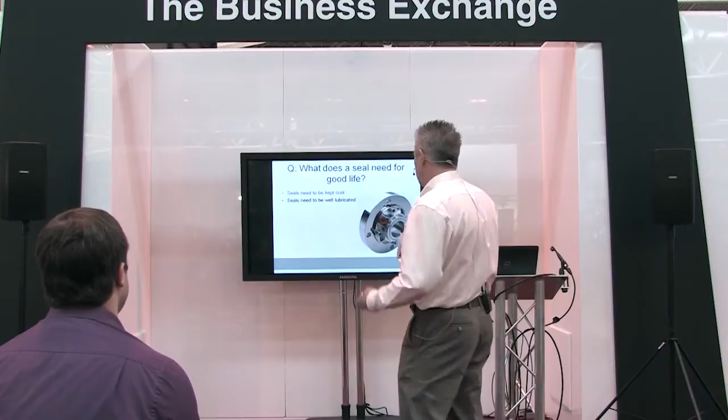Well, mechanical seals like to be kept cool, just like anything else that wants to give you good life. Mechanical seals need to be kept well lubricated, and the cooler I can keep them, guess what? Just like the engines in your car, the better lubricated that seal face will be.

I need to have a clean fluid between the seal faces, because here's the thing, all mechanical seals leak. They have to, in order to work. It's just that the level of leakage is so low you can't see it. And if you think about it, if you've got 2 seal faces in a mechanical seal, and you're running silicon carbide against silicon carbide, if they touched each other, they'd just get hot. They wouldn't last very long.

I don't allow that to happen. What I do is allow a very, very thin layer of lubricating fluid to pass between the two. And when it does, it takes the heat away. If I now allow that lubricant to be dirty, guess what? My mechanical seal won't last very long. Just like your engine in your car wouldn't last very long if you put dirty oil inside your car engine.

And I need that lubricating film to be stable. If it isn't, guess what? I've got poor lubrication between my seal faces. And now, as soon as I've got poor lubrication, guess what? I've got poor life expectancy.

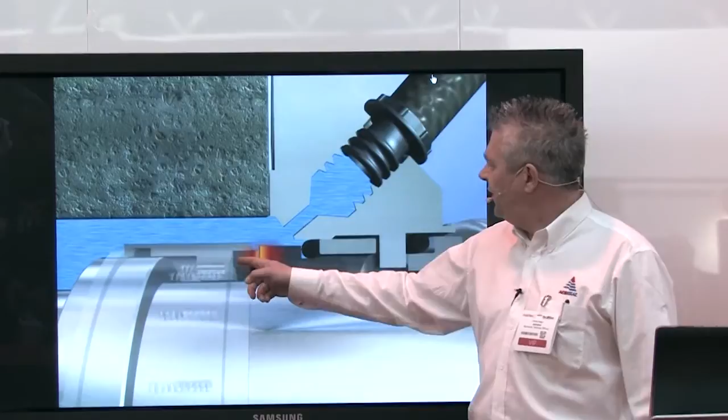Here's my mechanical seal. If I've got a single seal, it's called a single seal because I have a single pair of seal faces here. These two seal faces want to touch each other, but I don't want that to happen. So what I do is allow a microscopic layer of liquid to pass between the two, and that layer of liquid is only 1 micron thick.

Here's how it all works. If the gap between those two seal faces is only 1 micron thick, then any lumps or particles inside my fluid that are greater than a micron—and most are—now my seal faces act like a sieve. They act like a filter, stopping those dirty products from getting between the seal faces.

Because all mechanical seals leak, and high pressure always goes to low pressure. So if I can keep this gap stable, and have a nice clean fluid between my two sets of seal faces, guess what? My mechanical seal is going to last a long period of time.

But unfortunately, what we do is kill them off before they've actually got to their full life expectancy. So how do we do that?

Well, most of the problems come from equipment. A lot of industry runs pumps that are too big for the system. How do we know that? Because you run them with partially closed discharge valves. So why do you run them with partially closed discharge valves? Because the pump's putting out too much flow.

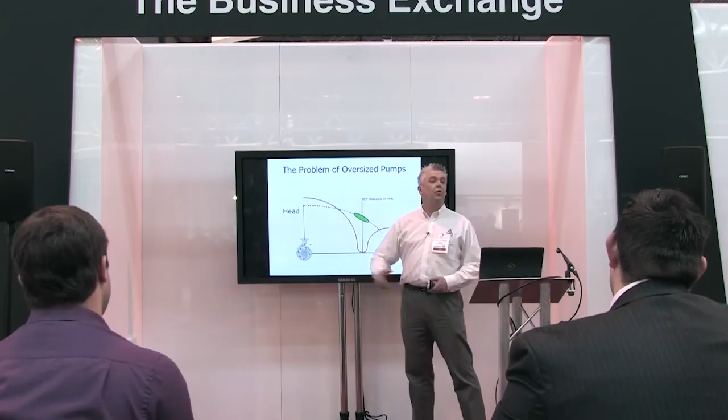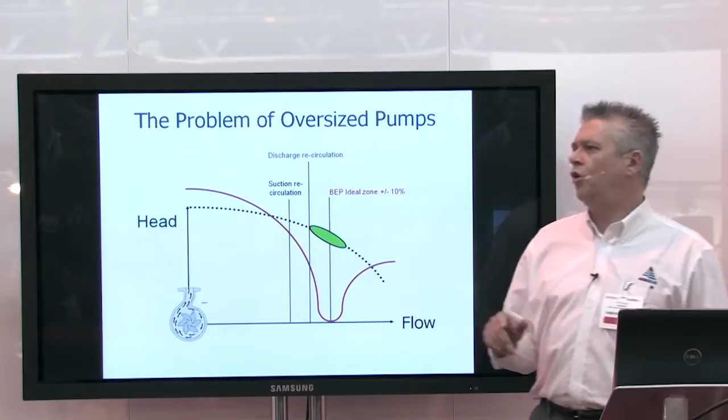As you put those forces on, you'll recirculate the liquid inside the case. If you throttle it back enough, you'll not just recirculate inside the case, you'll actually push it back to suction, because liquids follow the path of least resistance. So if it's easier for that liquid to travel 100 or 300 millimeters from discharge back to the suction side of the pump rather than going 300 meters up in the air, guess what it'll do? It'll take that shorter path.

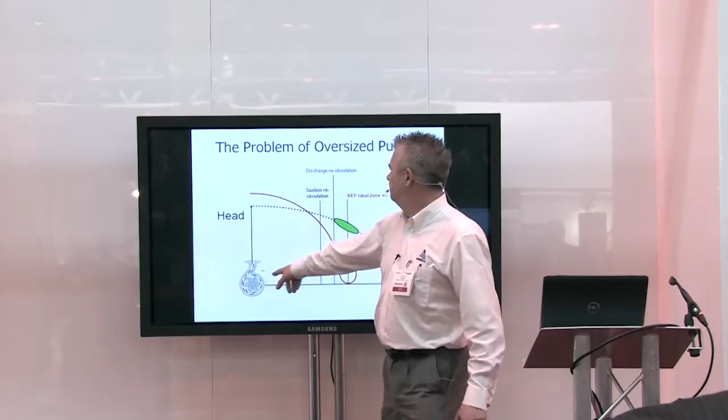I'll start to get reduced impeller life because now I start to bend the pump shaft, and the pump impeller now comes into contact with the casing, and now you have to start to replace wear rings.

Now I've got vibration occurring, and as soon as I've got vibration, this drastically affects the life of this, and also now the bearings in my pump as well. And those are the bearings you're spending a fortune on, putting expensive oils in and doing condition monitoring on, to make sure that they try and last a long time.

If I throttle it back enough, now the energy from the motor can't be used. So that energy turns itself into the easiest thing it can do - it turns itself into heat. And I raise the temperature inside the pump. As soon as I do that, I change the lubrication for my seal faces.

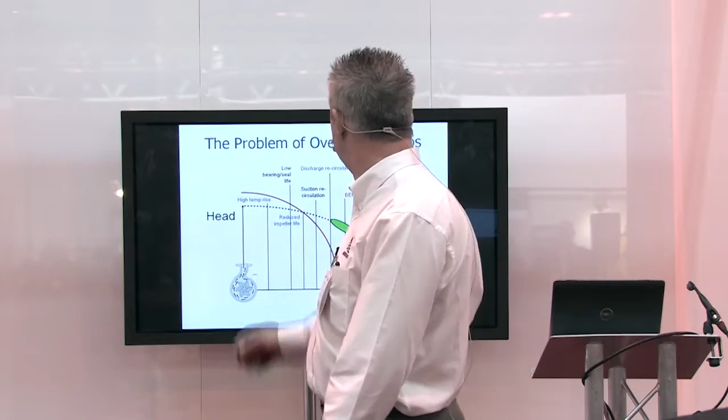If I run the other way, it doesn't matter really - I'm not going to throttle the pump back, let's just let it pump anyway. Now my pump puts hydraulic forces the other way because I'm putting out too much flow. And if I push that flow enough, I'll get to the stage where my pump starts to cavitate.

We've also got stuff like misalignment of equipment. My background is originally from maintenance, and I know we all like to align equipment properly, but sometimes we don't get the opportunity or the time. Why? Because production rules everything. Downtime is the killer, because that's a cost. So somebody somewhere has to cut a corner to get that piece of equipment back into service, and if you do, you're going to put vibration into the equipment, and that's going to damage my seal.

Because these only fail for two reasons: either the seal face opens or a part becomes damaged. And if I've got vibration, now my seal faces are opening and those particles can get inside and start to damage the seal faces.

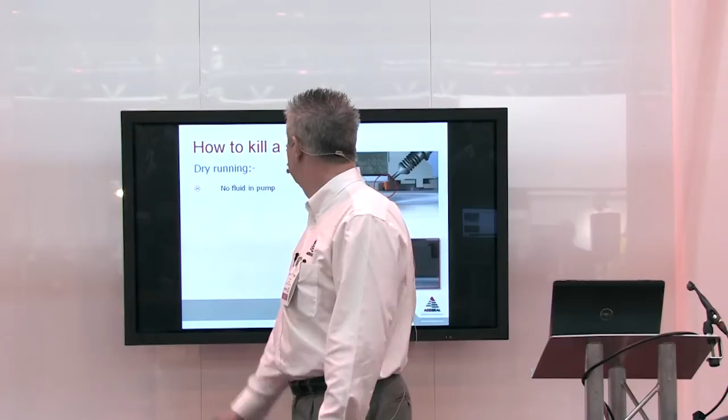Or we have people that run pumps with no fluid in - they pump tanks dry, or they don't open suction valves before they start the equipment up. And because mechanical seals are full of things like O-rings, I fry the O-rings in the seal instead, and now the seal's killed.

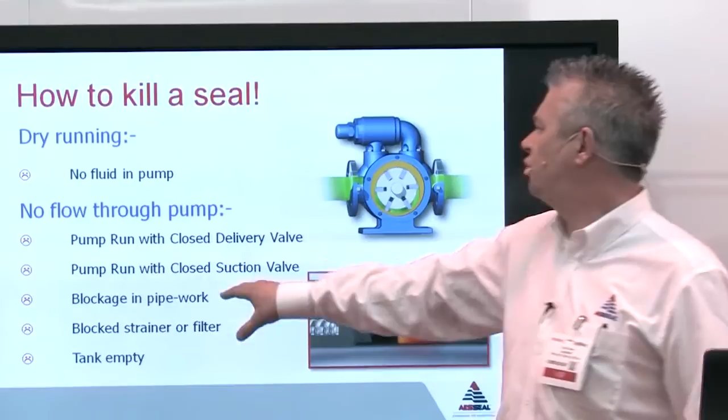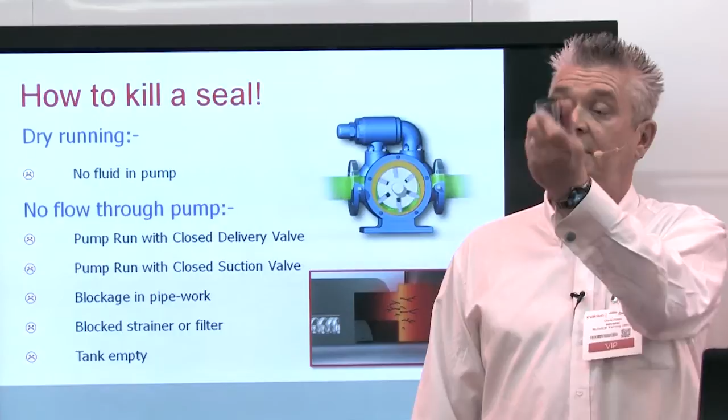Or for whatever reason, I get no flow through the pump. Somebody hasn't closed, somebody hasn't opened a discharge valve. I've got suction strainers or filters in the pump that are becoming blocked. All these things, as soon as I get no flow through the pump, I reduce the cooling to this. And these things like to be kept clean, cool, and well lubricated. If you don't, you ain't going to get good life out of them.

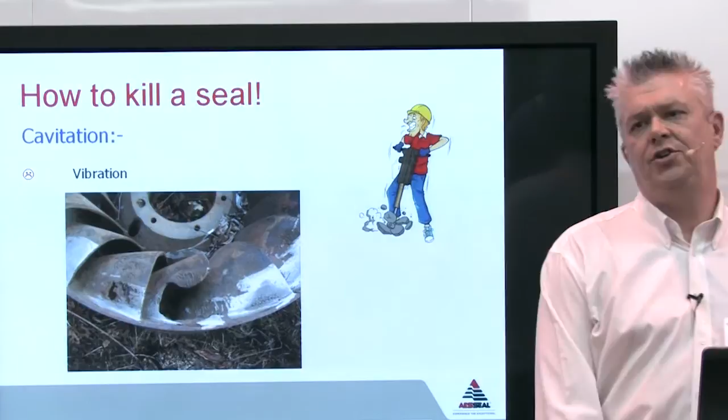We also have vibration too - cavitation damage if we push our pumps far enough. And sometimes we have pumps linked with pipework or sat on mezzanine decks. This pump here is vibrating away quite nicely, sat connected to the pump next door to it. So guess what we do? We kill the seal in the pump sat next to it because that one's vibrating.

And if we don't kill the seals, what we can quite often do is false brinell the bearings - we can flatten the bearings in the pump. So the next time we come to start it up, it's got a nice lumpy ride, and the first thing you do is take this sucker out.

What you need to have is something - you can't stop some of those things happening because that's what's going to happen. That's real life, isn't it, guys? So if you can't stop things from happening, what you need to do is put a surge protection device on your system.

If you gentlemen and ladies have got computers in your offices or at home, I bet you have some form of anti-surge device on your computer. True? Yes? Why would you have that? Because you don't want to fry your computer. True? How much does a computer cost? 600-700 quid? How much does a pump cost? Thousands. How much is downtime? Thousands. So we'll protect a £600 computer, yet we won't protect a multi-thousand-pound pump, sealing system and production facility.

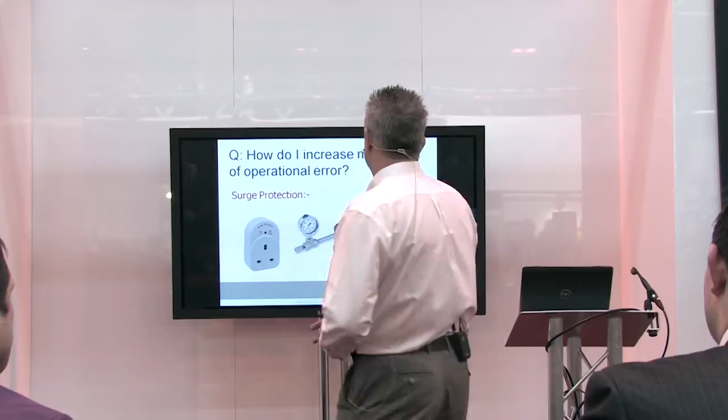We'll do things like electrical surge protection devices. We'll put safety relief valves on pressure systems, or we'll put burst discs in to prevent us from damaging stuff. Yet we don't do anything for these when things happen that are beyond my control.

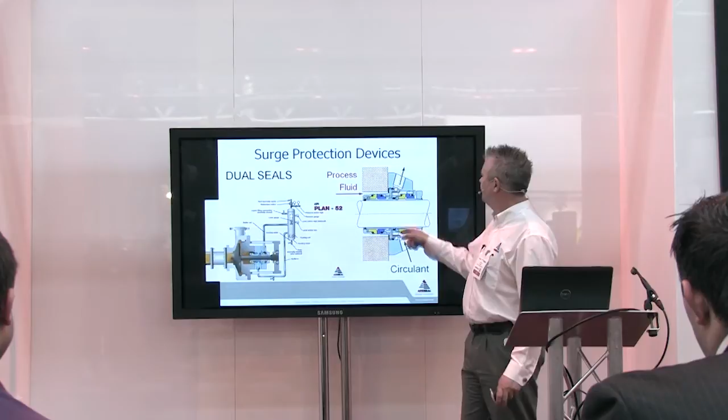But you can buy surge protection devices for mechanical seals. They're called double seals and systems. Now what we do with the double seal is, if I run a single seal, whatever the liquid is I'm pumping, that's what I'm going to use to lubricate my mechanical seal faces, because I have to get a lubricant. Now what I do with a dual seal is, I put two sets of seal faces in, and I put a circulating fluid between the two on an encapsulated system.

Now because I've done that, I get to choose the lubricating fluid that passes between those seal faces. When I run a single seal, I have to use the product to lubricate my seal faces. I haven't got a choice. So I get a bump in the night, I get those things that change the gap between my seal faces. I can't do anything to stop it.

If I put two seals in and circulate a clean, cool, compatible liquid between the two, now I do get to choose. Now when those seal faces open, which I can't stop happening, all that happens is nice, clean, cool lubricating fluid that I've picked passes through the seal faces instead.

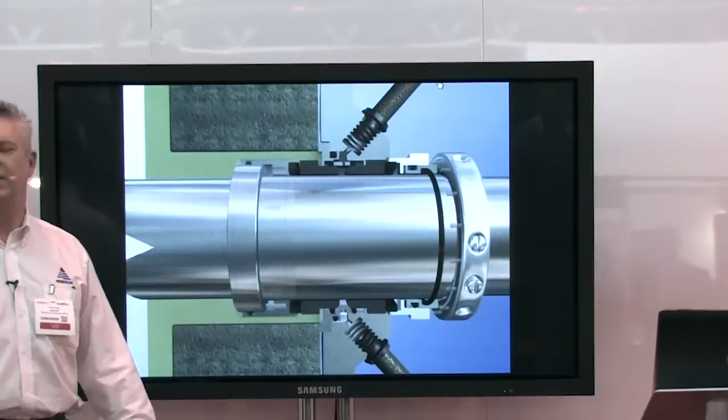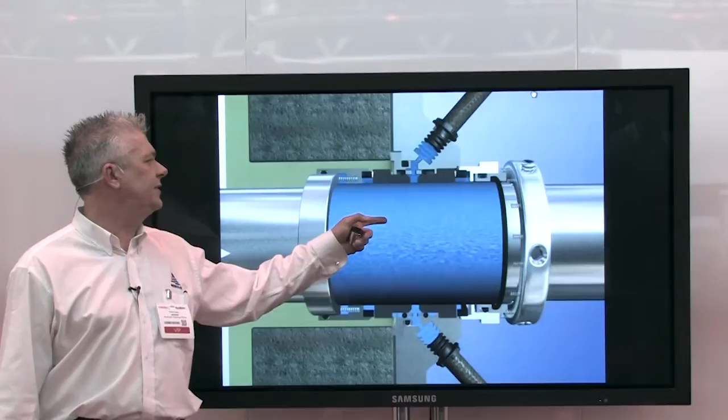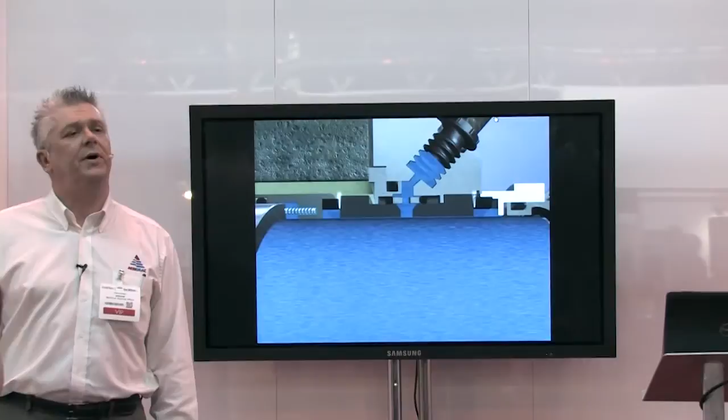So here's my dual seal, two sets of seal faces. I've now got a dirty product in here, and that dirty product wants to get between my seal faces. I don't want that to happen. So what I now do is introduce inside a clean, cool lubricating fluid, and I pressurize it inside here so that the pressure inside here is higher than the pressure inside my pump. High pressure goes to low pressure. All seals leak, so now the lubrication fluid that I've chosen passes between the seal faces, and it's a clean, cool, compatible fluid.

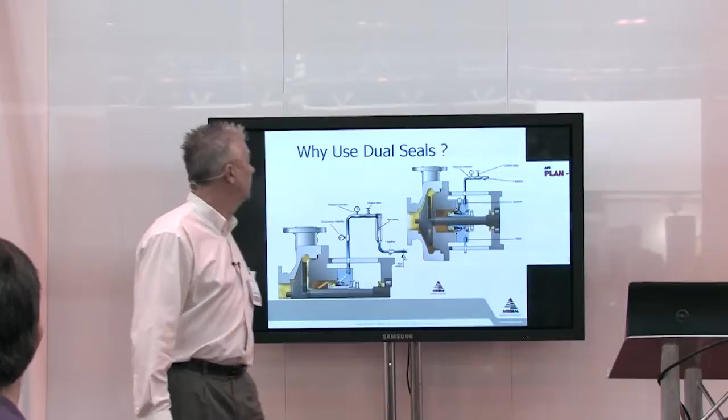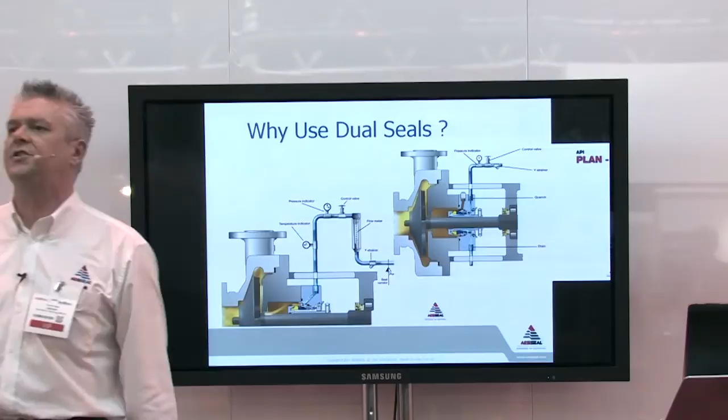If we run single seals, quite often we'll run systems like this, either with an external flush line to try and dilute the fluid inside or cool it, or we'll run sealing systems on the atmospheric side of the seal. So as those liquids pass between the seal faces and leave deposits inside the seal, I put a circulating fluid inside that takes those away.

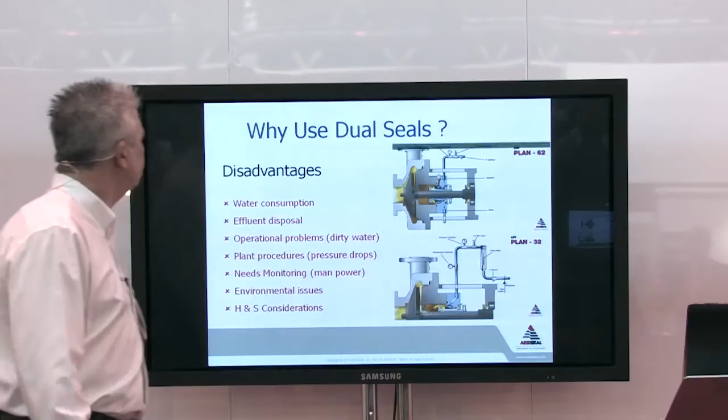But there are lots of problems with running systems like that. I'm going to use a lot of water, and that water is actually going to end up in my effluent system at some stage, or I'm going to have to extract it, and that's all a cost.

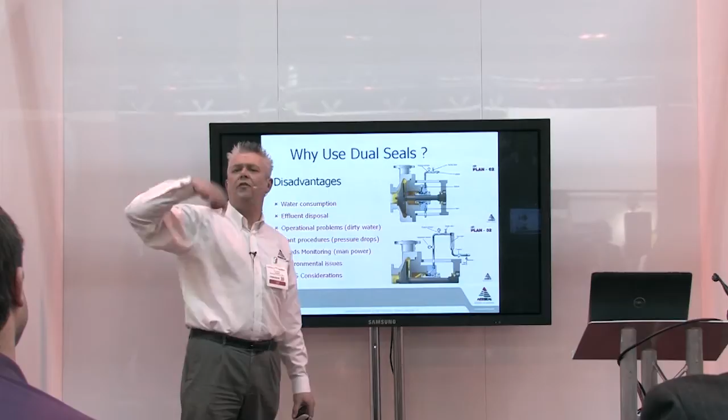I have the problems with plant drawing down on that water ring main as well, because we have people that wash equipment down. Do you wash equipment down? And when you wash equipment down, the guys don't use half-inch hoses, do they? They use like a 2-inch or 3-inch fire hose, and now they're spraying that stuff around all over the place. And as soon as they do, they rob that ring main of the fluid that's now controlling your mechanical seals.

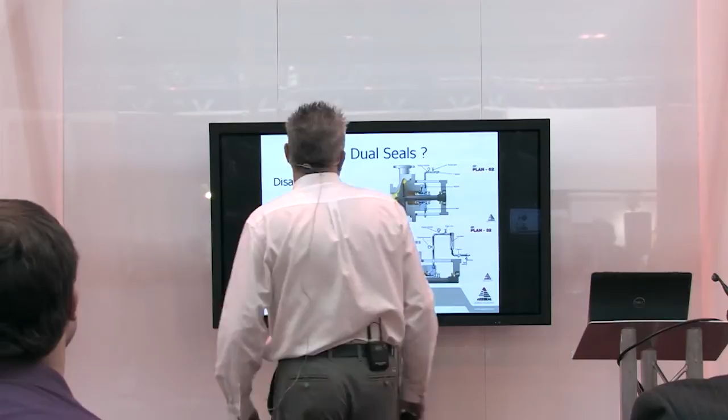And we also have environmental issues and health and safety issues with running seals that can leak into atmosphere.

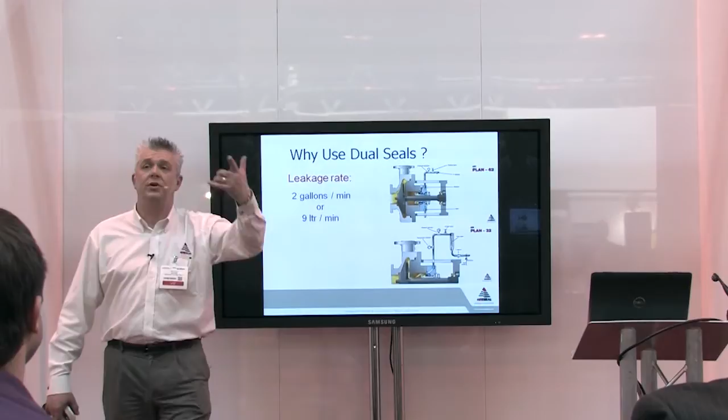Here's something that's interesting now. If you have a leakage rate on one of these seals with a flush line or a quench to drain, which are really, really common, if you have a leakage rate that's as low as 2 gallons a minute, that's the equivalent of 1 million gallons of water per year per seal. And that 1 million gallons of water is either going to end up in your product and you've got to extract it, or it's going to end up in your effluent system, you're going to have to clean it and then dispose of it.

1 million gallons of water a year? Sounds like a lot. Can anybody picture 1 million gallons of water? Bit hard, isn't it? 1 million gallons of water is approximately equivalent to around 16 road tankers full per month. So if you run pumps with flushes on or quench to drains, that's the amount of water you are leaking and wasting into your product every year.

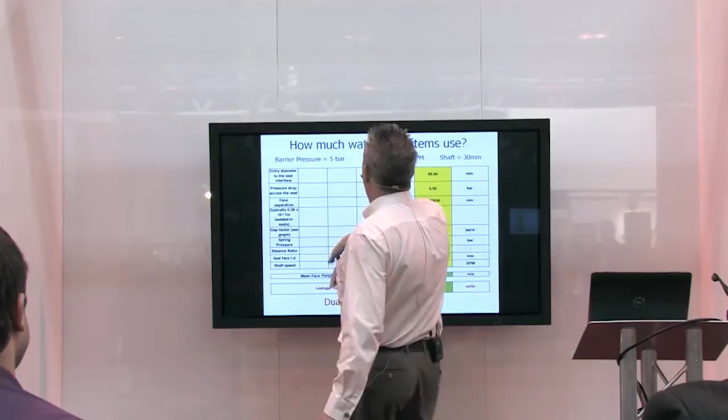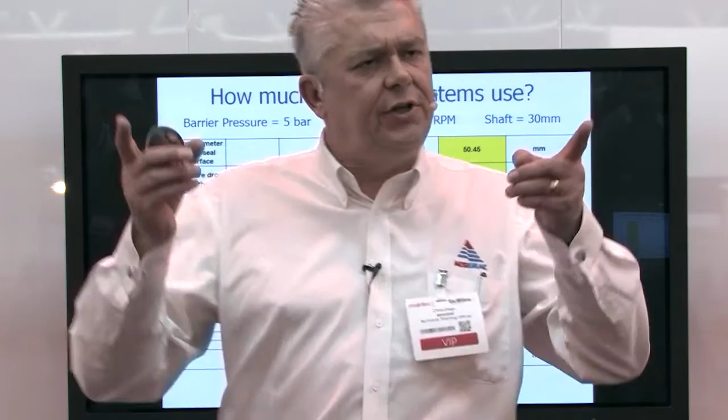Well, if you're running quench to drains or flush systems, you're using 16 road tankers worth a month. If you change over to a dual seal with a seal support system, your leakage rate now is down to less than a teaspoon a day, or the equivalent of about half a can of Coke a month. So you can either use 16 road tankers of water, or you can use half a can of Coke. I'll leave it up to you to decide which one you'd rather use.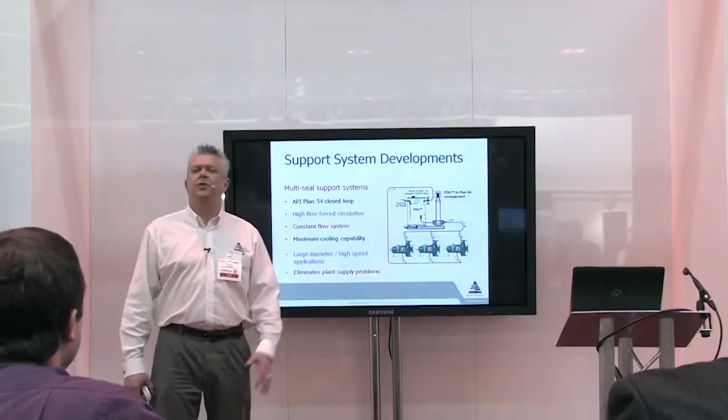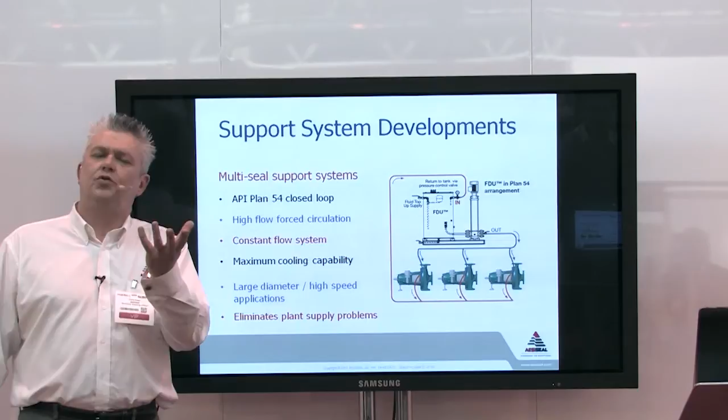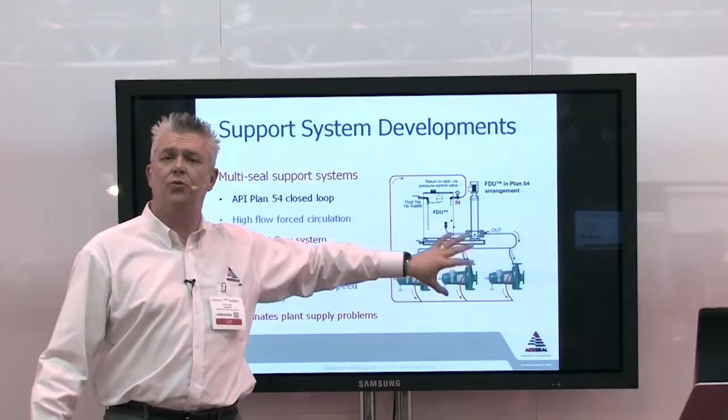So what can we do? There have been developments with systems now where we can support multiple seals from dedicated circulation systems, because we want to get away from those problems of dirty ring mains, or ring mains that get the water pulled down, or suffer evacuation problems. What we can actually do now is connect multiple seals into a dedicated seal protection device.

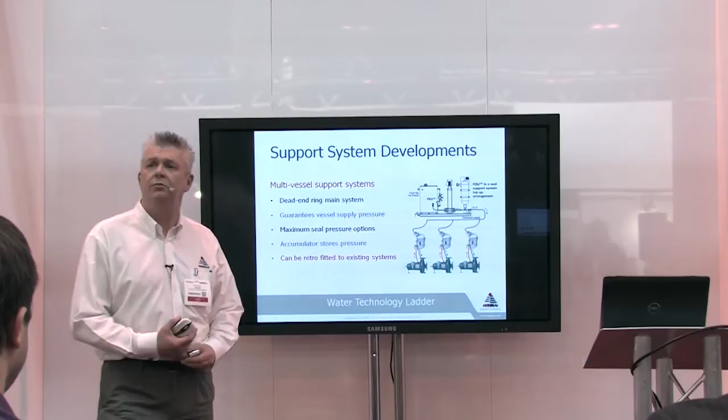Or we can run them on individually pressurised systems, where each seal is purposely set to its own individual pressure. Some applications I may want to run with positively pressurised seals, or some applications I may want to run with passively pressurised seals. If I run systems like this, and these are the latest developments, I can take more control over the fluid I'm using to lubricate and supply the system.

The other problem is, if anybody here is involved with the food and beverage industry, one of the problems we have is bacterial growth in a system.

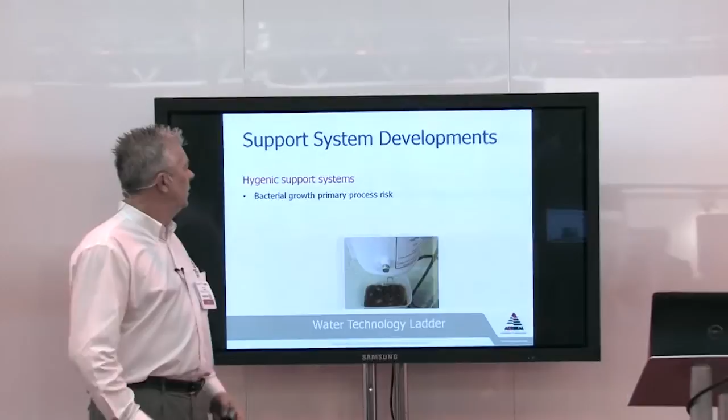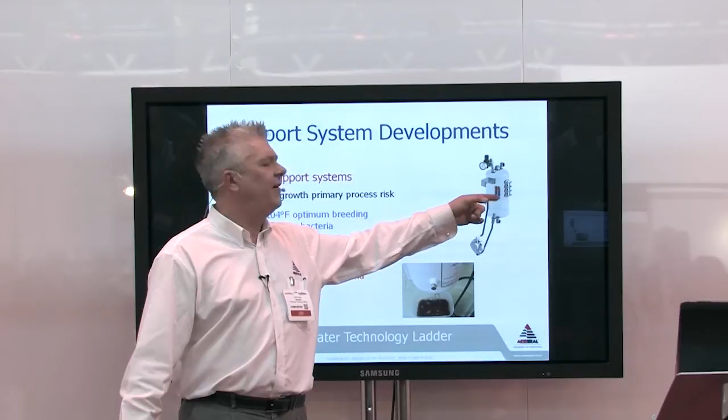If I normally run a double seal in a system, because all seals leak, I don't want to have high pressure going into my product, because that would be a potential contaminant. So what I would choose to do is make this a passive system, where the pressure inside that seal pot is lower than the pressure inside my pump. But the problem is, now the product is going to leak through the seal and end up contaminating this support vessel.

And that's now a problem, because the temperature in there is going to be between 40 and 60 degrees, and that's a good temperature for growing bugs. If I'm involved in the food and beverage industry or the pharmaceutical industry, one of the things I don't want to do is introduce the presence of bugs into my system.

So guess what I do? I don't run seal support systems like this. I now run systems that run on a quench to drain, and I still chuck all that water down the drain. For companies like Coca-Cola and the big drinks companies, that's a major problem.

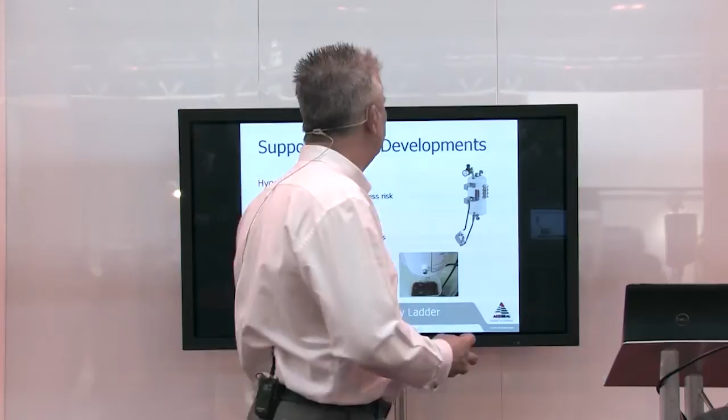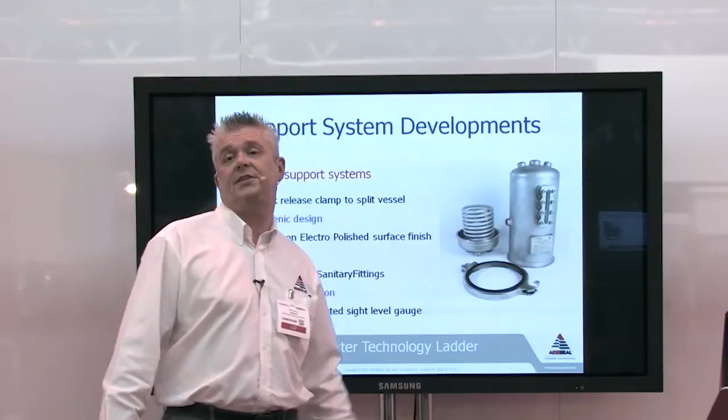What we've actually now been able to develop is vessels that come in two halves, because the problem with the old-fashioned standard vessel was I couldn't get inside this to clean it, to make sure it was clean inside. What we've developed as a company is a split vessel, where we can even put in the top CIP inside.

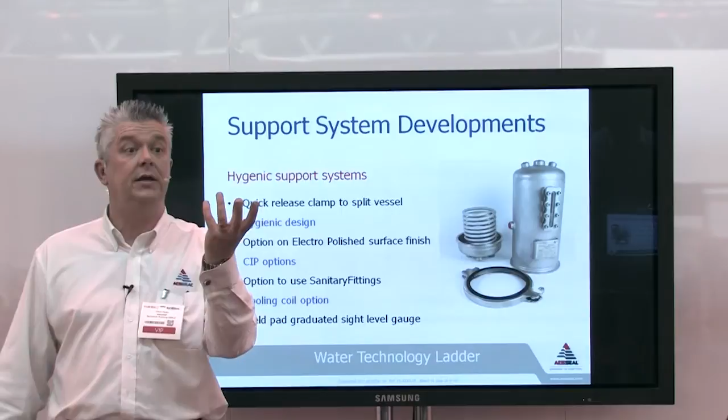You can actually disassemble the vessel, clean it, and take it to pieces. We've even put hygienic polished welds in there, so there are no bug traps and no hiding places for those liquids inside the seals.

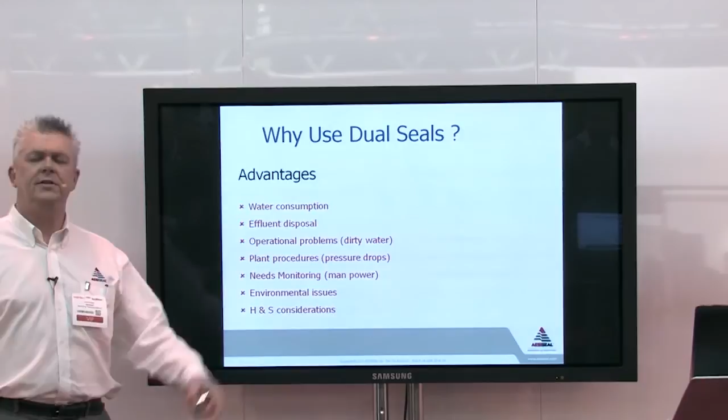So why do we want to use dual seals? Well, these are all the disadvantages of using single seals with those quench to drains and those flushes. The advantage of using a dual seal is that I eliminate all those things - all that water wastage, all those health and safety considerations, all those environmental concerns and costs. Plus, the added bonus is I also overcome all those other problems that the production side of the business puts on me.

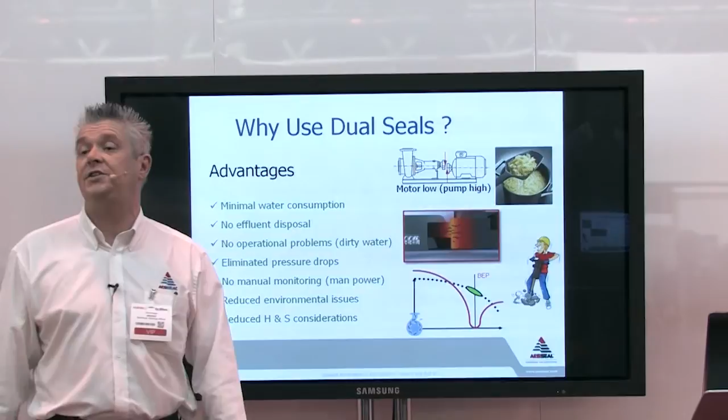Now if I get pumps running dry, guess what? I don't care, because I've now put a circulating fluid between the two. I don't care if I've got slight bits of vibration inside my seal, because when those seal faces open, all I'm going to do is allow a nice lubricating fluid to pass between them and protect my seal.

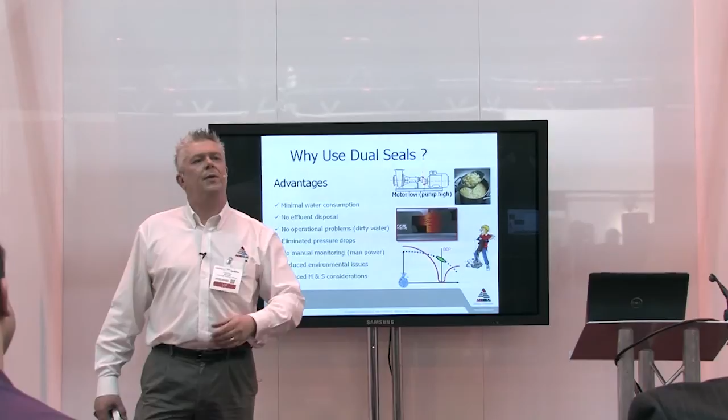If I've got pumps running away from their best efficiency point and I'm getting radial deflection, those hydraulic loads - now when that happens and my seal face is open, all that happens is nice clean fluid passes between the two. What I'm going to do is protect the system.

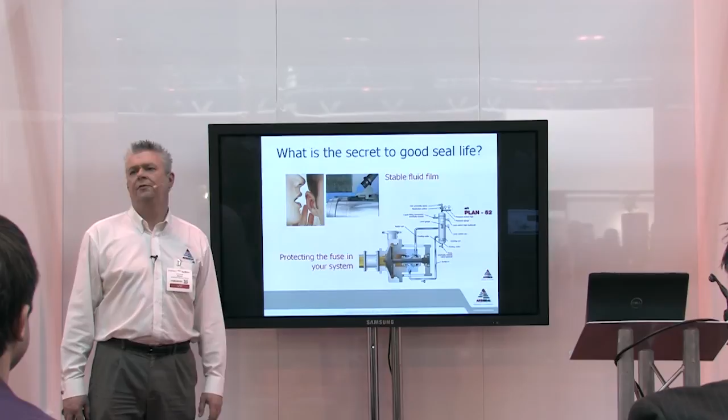So what's the secret to getting good seal life? Well, the secret to getting good seal life is my seal faces need to have a clean, cool, stable fluid film between the two, and I need to put a seal protection device on my system. Put dual seals in - it's the only way you will have of increasing your window of operational error.